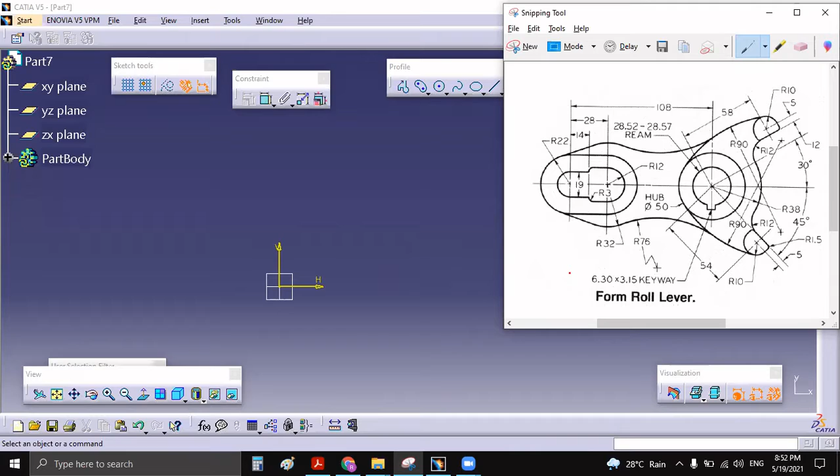In this video, we are going to draw a sketch of form roll lever. We are going to see more and more difficult sketches so that more commands we will cover as we proceed to next sketches.

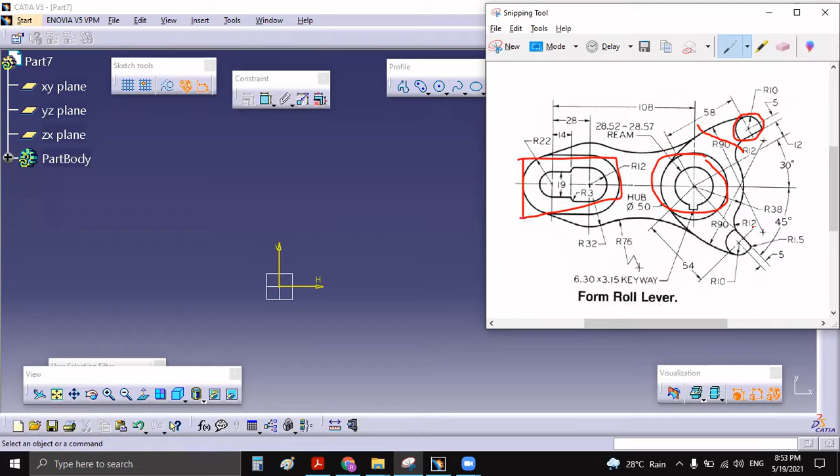Let's see how many steps we will divide this into. First step will be this part, then second part, then third and fourth, then fifth, and mirror is the sixth part. Total in 6 steps we will finish this drawing.

Let us start. We are going to consider this point as origin.

Here we have to draw two circles. Here we have to draw an elongated hole. Just see, this elongated hole we are going to draw first, outer elongated hole, and one more elongated hole is there, that also we are going to draw. Let us start.

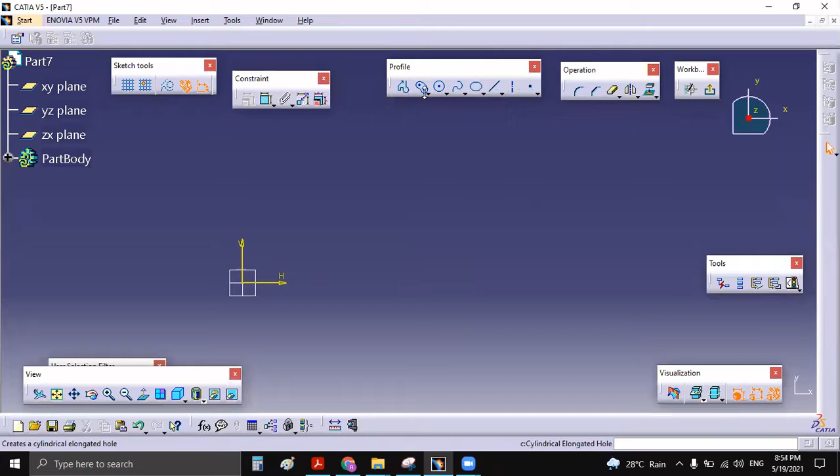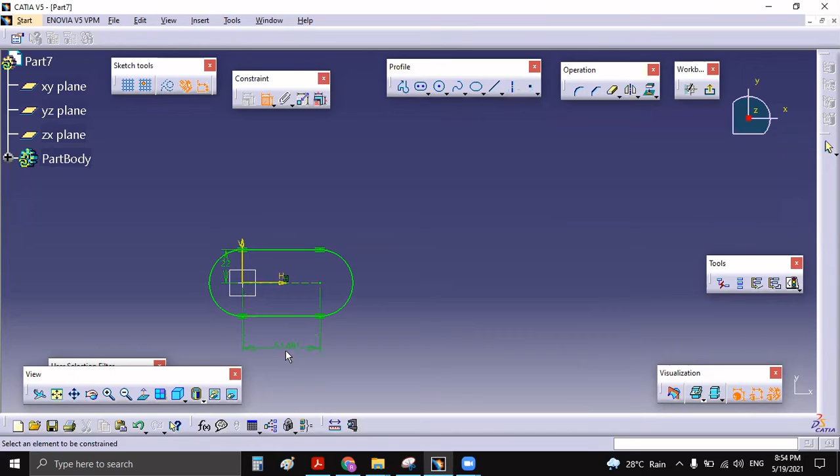From here select elongated hole, first to second, like this. Just give dimension: radius of this one is R22 and the center distance is 28. Let us check once again. Center distance is 28, yeah correct. So this is 28 we have given, and this is 22.

Now next, we have to draw this diameter 19 circle. This half circle we will draw, and then we will proceed with that. Diameter is 19, we just go to diameter and make it 19, and this is R12, which again we can say from this it is around 28. Okay, R12.

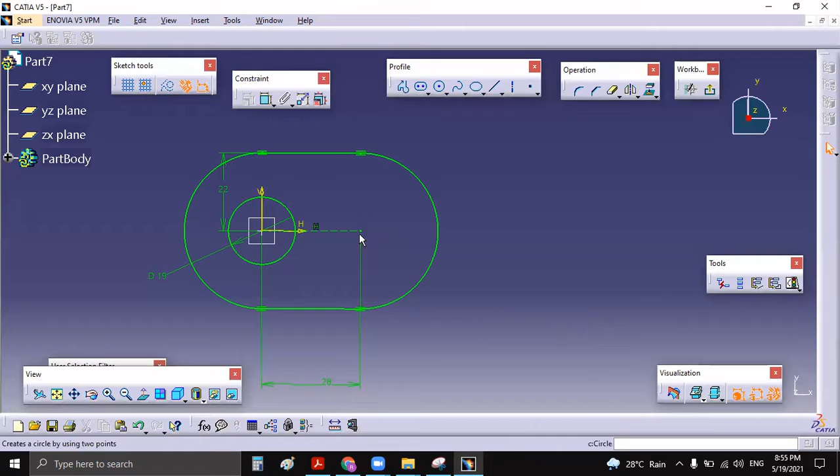So radius is 12. We need to draw the correct line. Now just a straight line, one small arc is there, again straight line, horizontal line. Let us start, we will start from here. It will be like this. Then a small arc is there, like this. Again straight line. It will be horizontal.

Just make this line tangent to this circle. Just go here and make tangency. This and this tangency, correct.

Now you can give the dimensions of this one. It is around R3, and from this vertical line, this point is around 14 mm. Just mention that 14. Now you can trim extra portion, so we don't require this part and this part.

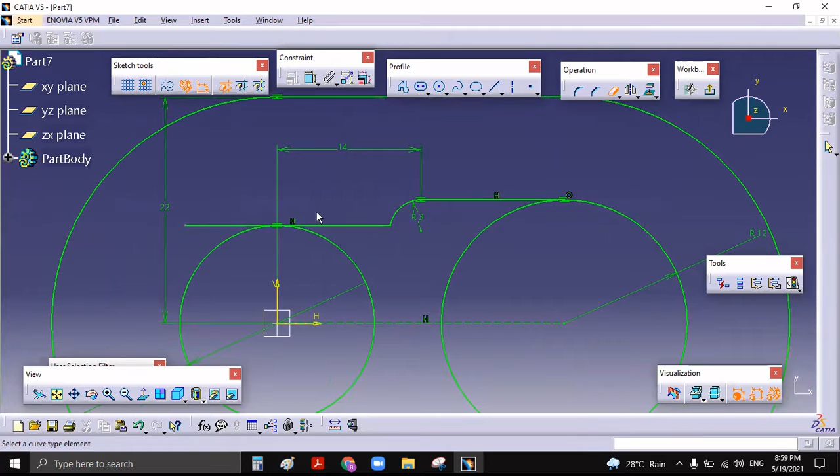Correct. Now again, you can select these three edges and mirror that about this axis. So you can trim all remaining portion like this. Yeah, so we have completed our first part.

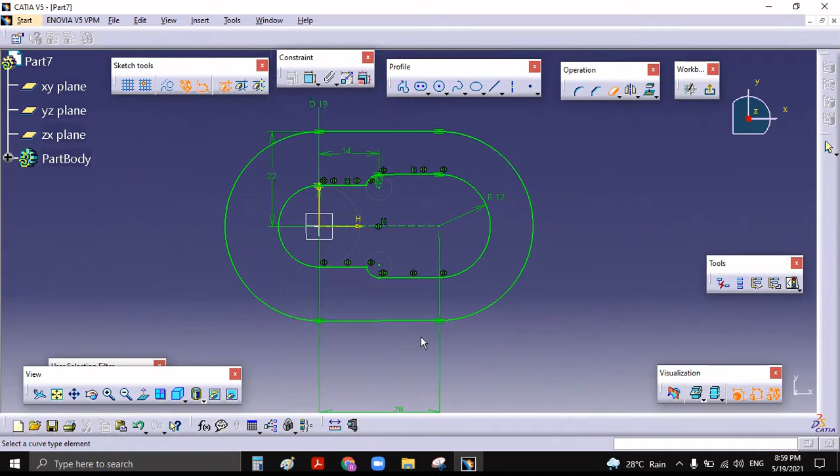Now second part, you draw these two circles and one small rectangle is there, which is around 6.3 mm and 3.15 square rectangular box. Let us start, so the center line is same. This horizontal line is the center line for both circles. Just double click here, go here, just draw two lines. Don't take any reference.

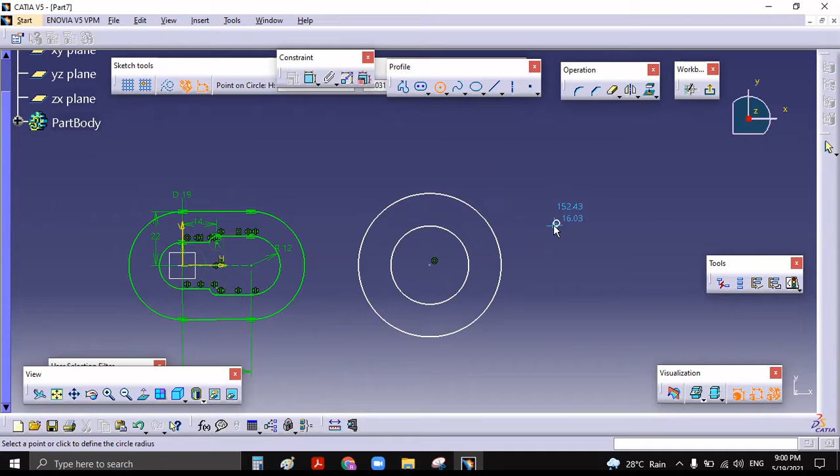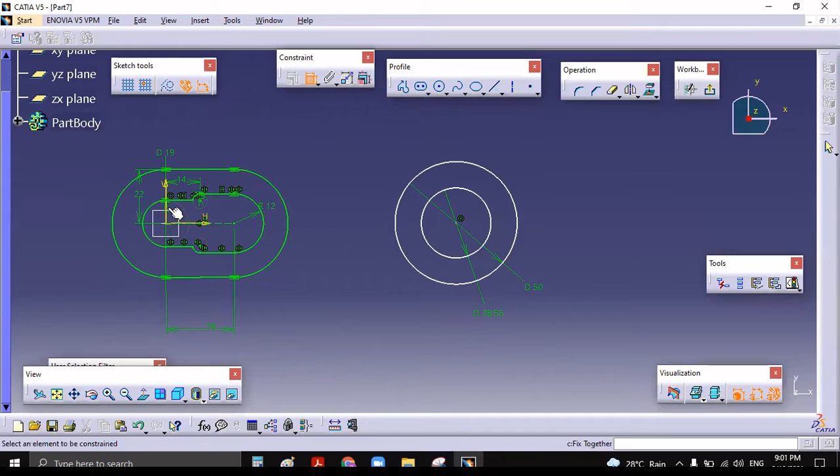Just double click here and make this diameter 50, and again diameter 28.55. Correct. And now we know the central distance between these two, it is around 108. So from this to this it is 108.

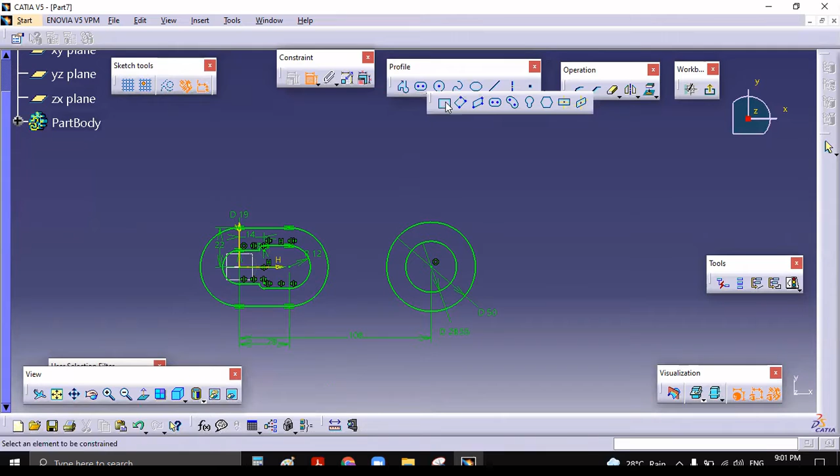Correct, yes. Now we have to draw this portion, where it is 6.3 into 3.15. So you can take a rectangle, or you can use the central rectangle here, and it will be like this.

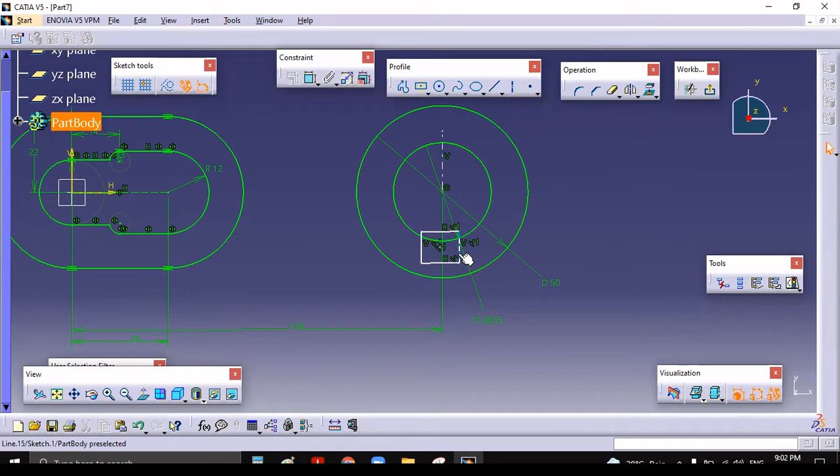Now this side and this side should be symmetric about this point. So as this is keyway, you should draw one vertical line like this. Now select three edges and go here and make them symmetric like this.

Now you can trim all unnecessary part again. Just select this, like this.

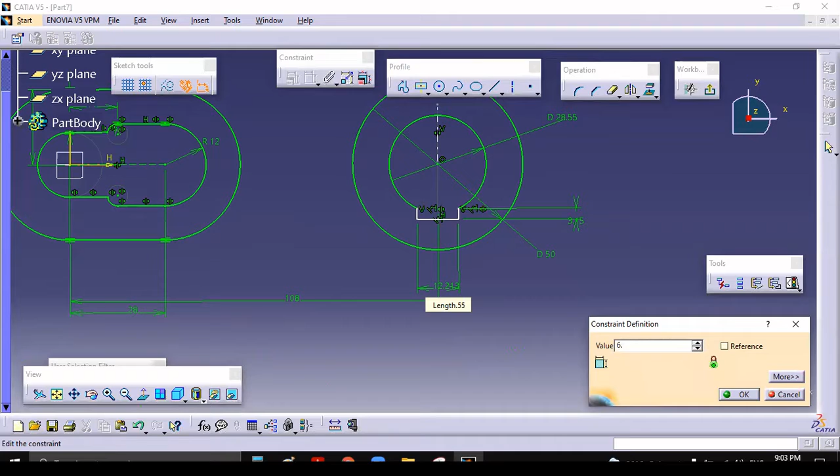Now again you can give dimensions. So this distance is around, just see, it is around 3.15 and 6.3. It is 6.30. Now you should make this coincident with this one, like this. Yeah, now it is fully constrained.

So two steps we have finished. Now you focus on this part. Here it is the combination of one rectangle and half circle. Let us start that.

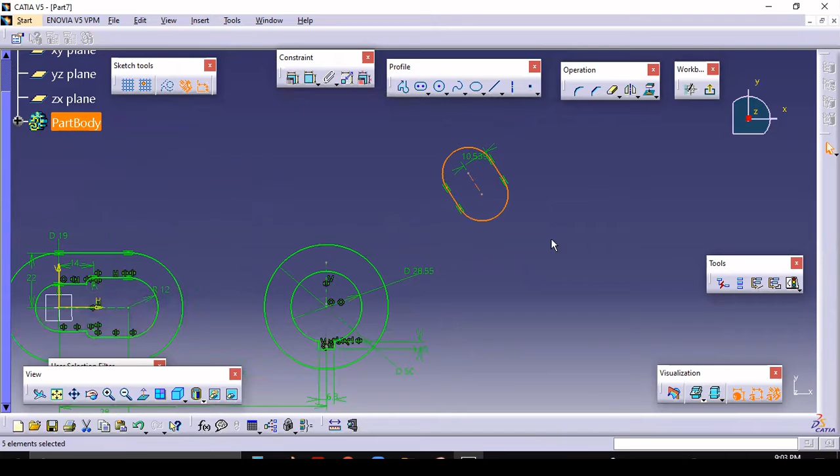An angle is already given, so angle is around 30 degrees, and this distance is around 12 mm from this angle. We'll draw one centered rectangle here like this, and one line will be there which is 10, normal to that one.

And now you can trim this portion. So I will trim this also, and this portion. So if you just see, it is R10, so just mention here R10.

Now one more thing, you just go through it. This is R90 circle, which is tangent to this and this also. So just go here again, draw this.

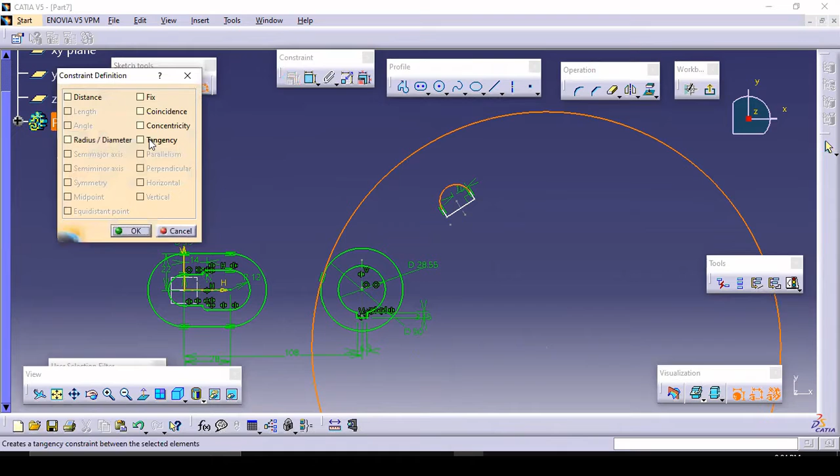Select these two circles and make them tangent, like this. Now you can give the dimensions of this circle. It will be radius 90.

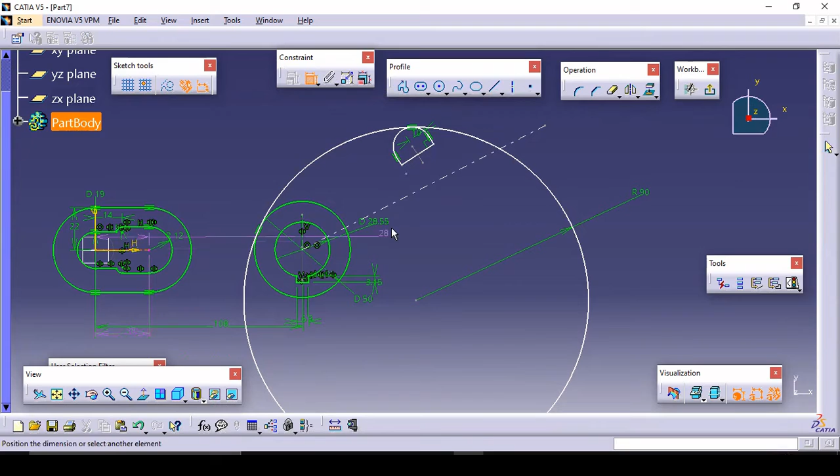Yes, it is like this only. Now one more thing, there is one line like this, and the angle with horizontal is around 30 degrees. I am talking about this line, it is 30 degrees there.

Now this line should be parallel to this one. So this and this should be parallel. Just make them parallel, and then give distance between these two. The distance between this and this line is around 12 mm.

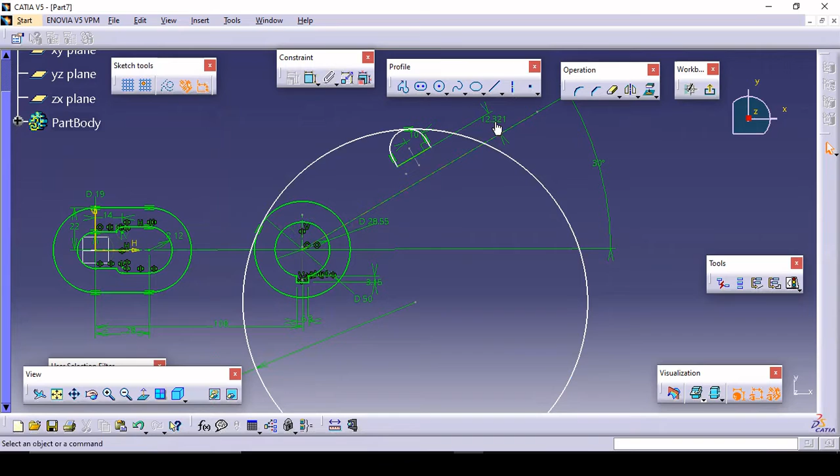One more thing, from this center to this center it is 58. That also you need to mention. So distance between this point and this point is 58. Yes, it is around 58. Correct.

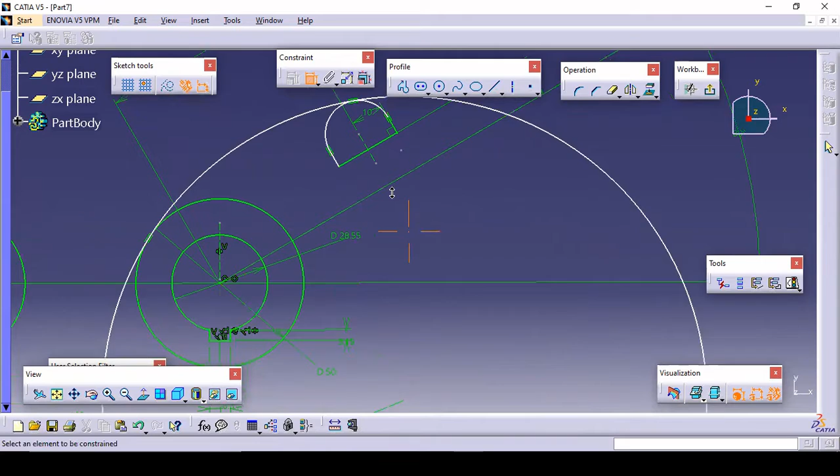Again, this line and this line are parallel to each other. Just make them parallel.

So if you now just see this, this is R10 and this is 5. So from this edge, this center is 5 mm. Just go here, select this point and this point and mention that 5 mm.

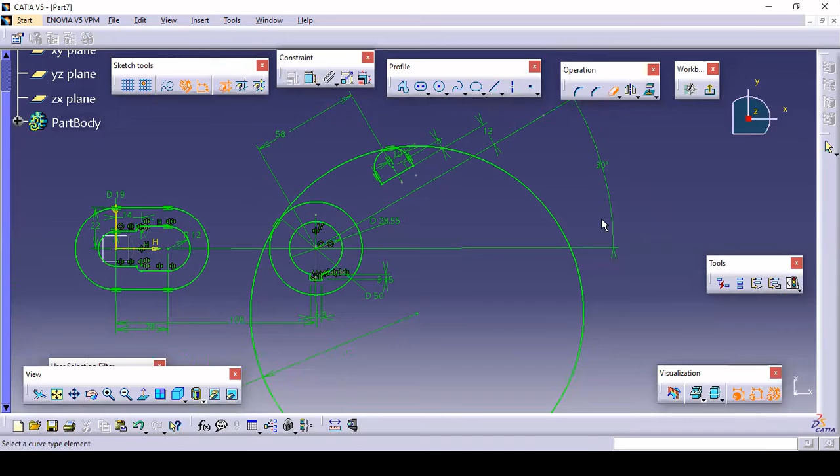Now it is fully constrained, so you can trim the unnecessary part like this. Correct.

So we are completed with this part and this part. Now this part is remaining, this arc. That is R12 and one more arc of R38.

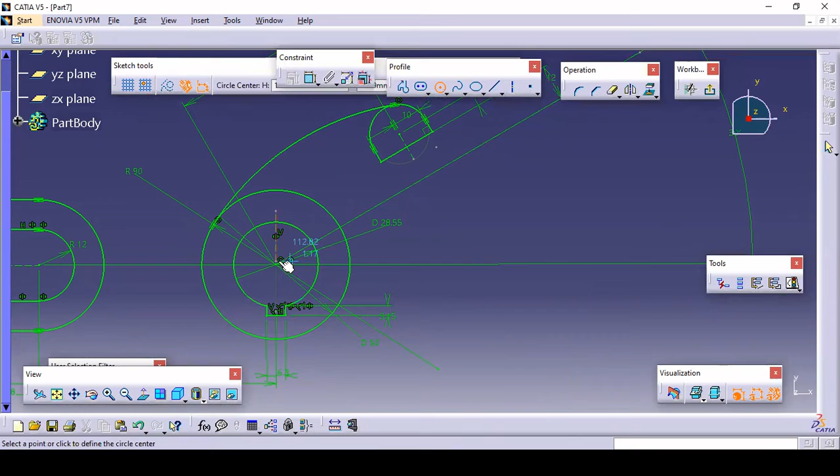This R38 starts from the center here, and just give it R38, correct? And R12 is there, sorry, R12 is coincident to this point, coincident to this point, and this R12 is tangent to this R38.

So draw one more circle. Don't take any reference, just draw it randomly and make it R12 like this. Now select this point and make them coincident, and these are tangent to each other, so just give them tangency.

Now trim all the unnecessary part, this extra part, this part, sorry.

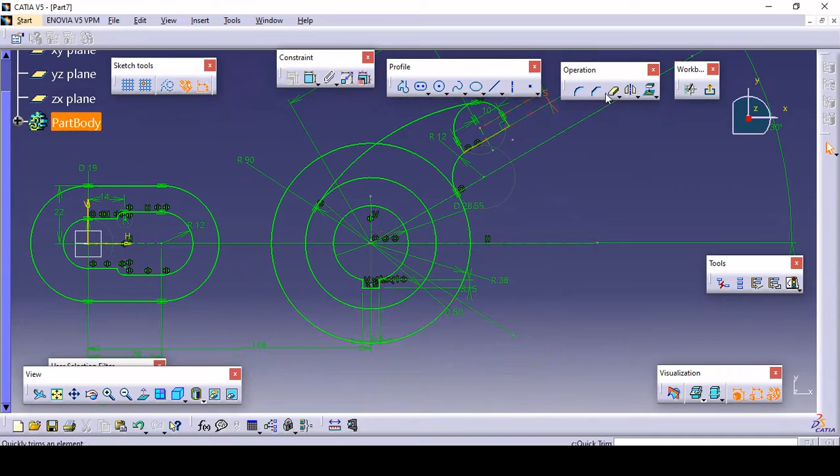We should draw one axis line so that we can trim up to that part only. So just double click and remove this part and this part. Now this is totally ready.

Now we can select the first, second, third, and also this one like this, and just mirror them about the horizontal axis. Yes, okay, now this total part is ready.

Now you just need to merge this and this. So how to merge these two parts? If we just check, there is one R76 that is tangent to this R32, correct?

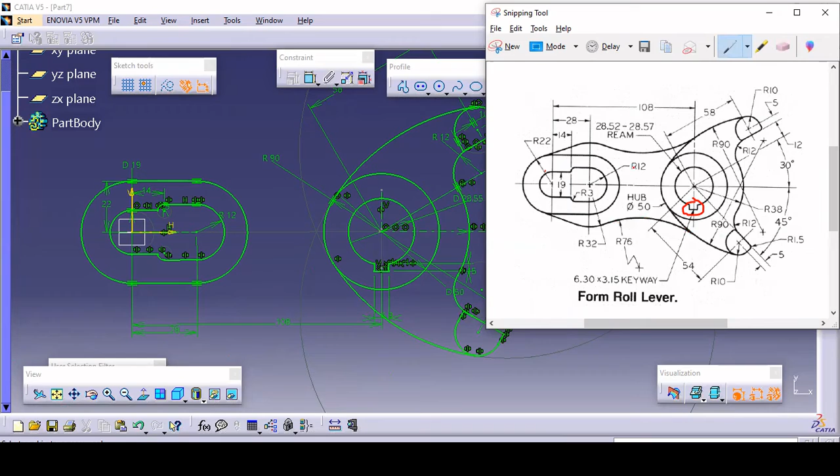And one straight line is there. So if you just revise it, one straight line is tangent to this one, which is tangent to this R32, and R76 is tangent to this one. So like that you need to draw. Let us start.

This R32 starts from, just see, this center. So just go here and draw the R32 circle, R32, right?

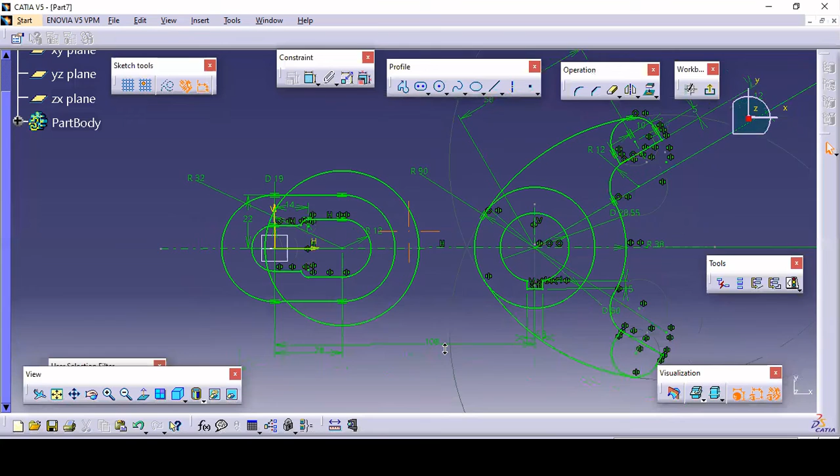R32 we have drawn, and one more R76 you need to draw. So just give this as R, I think it is 76. Just it is 76.

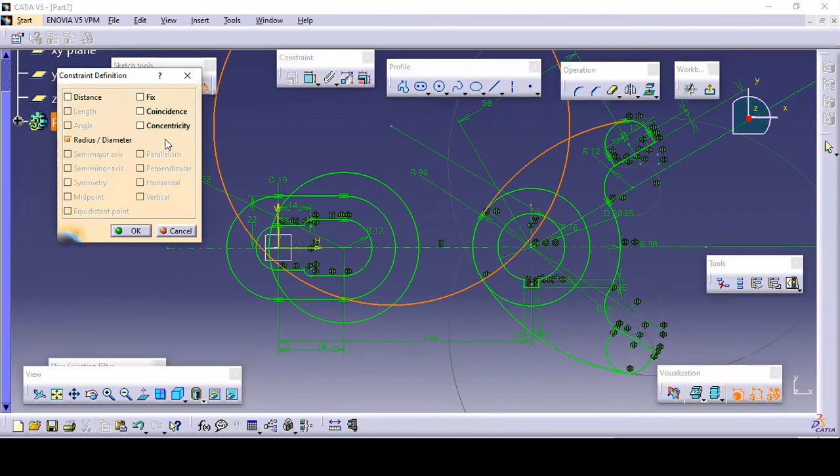Now you should make it tangent to this, tangent. Click OK, and select this and this and make them tangency.

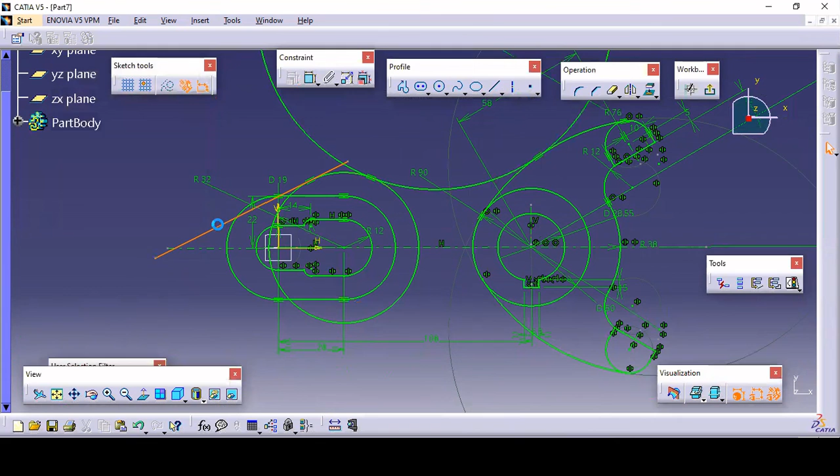Okay, like this. Now you can draw one inclined line like this, and it should be tangent to this line. Make them tangent, and also it is tangent to this also. Now you can trim the unnecessary part.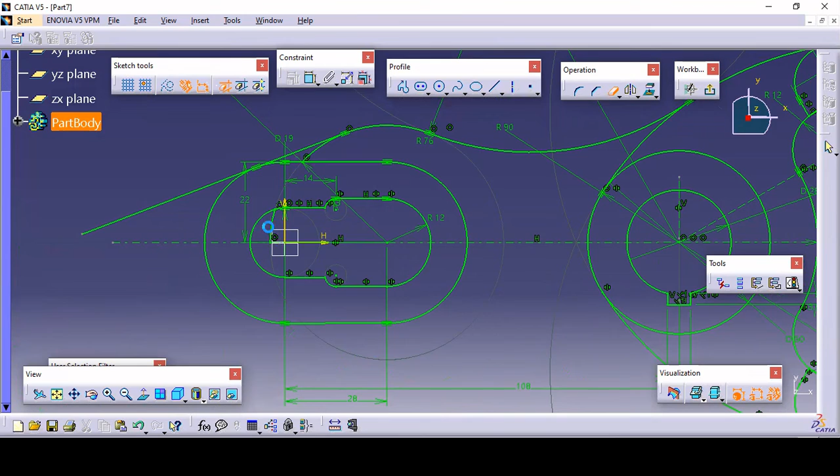So we don't require this part, sorry, this part, this part, this part also is not there. Yes, now it is totally complete.

Now you can again select these lines and trim that about this axis. Okay, so this is how we can draw this.

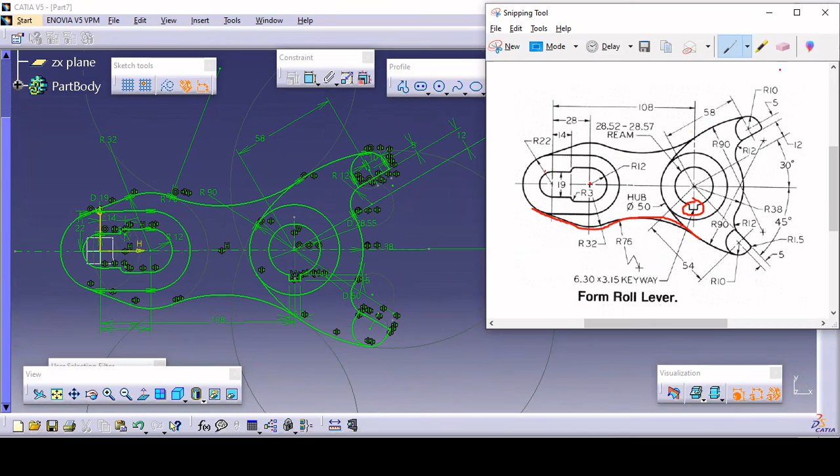So if you just revise this: in the first step we have drawn this part, in the second we have drawn this, in the third we have drawn this upper part, we mirrored it in the fourth part, and the fifth one will be this one. So this is how you can divide a whole sketch into small parts and draw it easily.